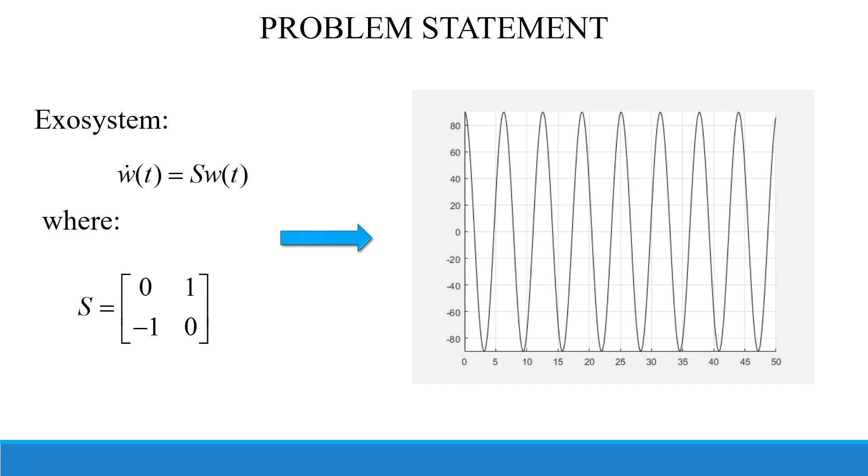However, there are applications where the exosystem may be unknown. In this context, the present paper proposes a controller based on output regulation theory, where a high-gain observer is used to estimate the states of the unmodeled reference signals. This observer is structurally integrated into the discrete form of Francis's regulation equations as the exosystem.

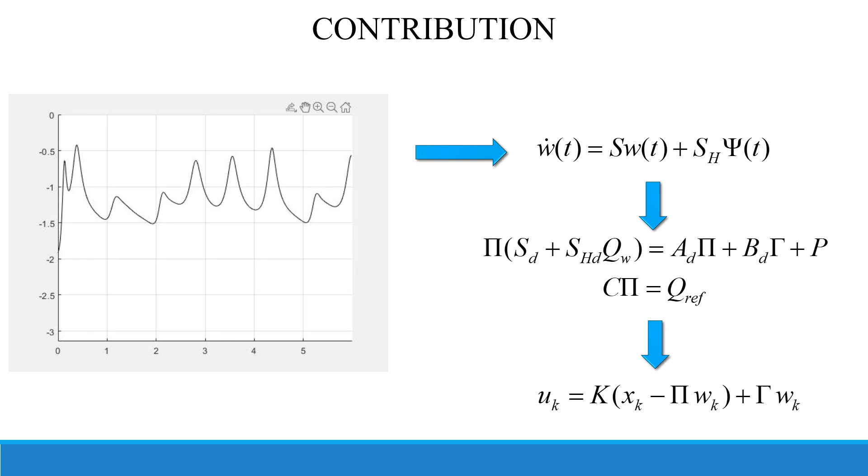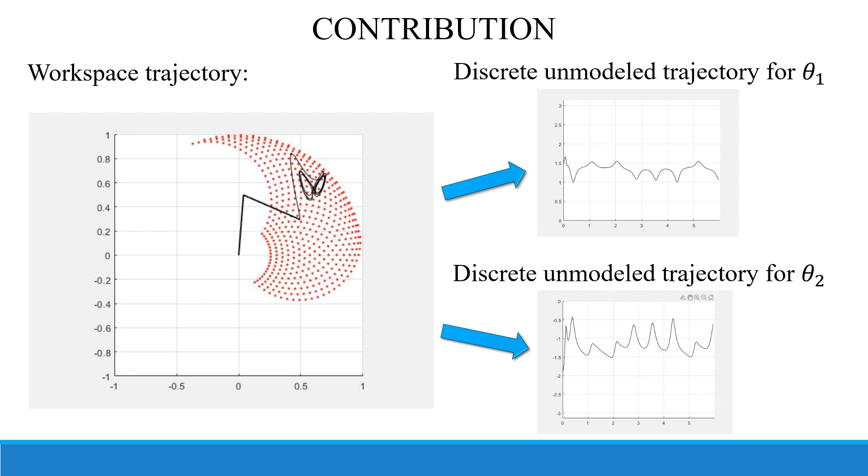The proposed approach assumes that discrete unmodeled reference signals are obtained by transforming a given trajectory from the workspace into joint space of a robotic manipulator. As a first case of study, a reference signal in Cartesian coordinates given by a Lorenz attractor is considered.

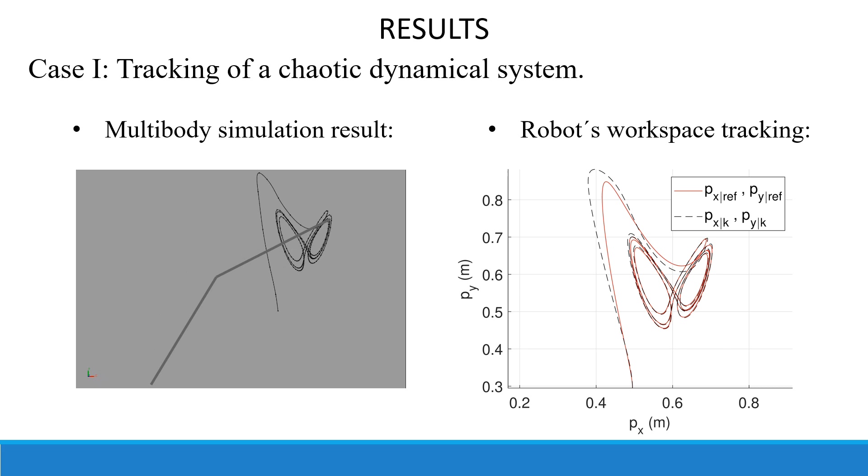The Lorenz attractor is characterized by its chaotic dynamics, sensitivity to initial conditions, and unpredictable behavior, making it ideal to demonstrate the robustness of the proposed control approach. Simulations depict the estimation and tracking of the reference signal for joint 1 and joint 2 with a bounded error.

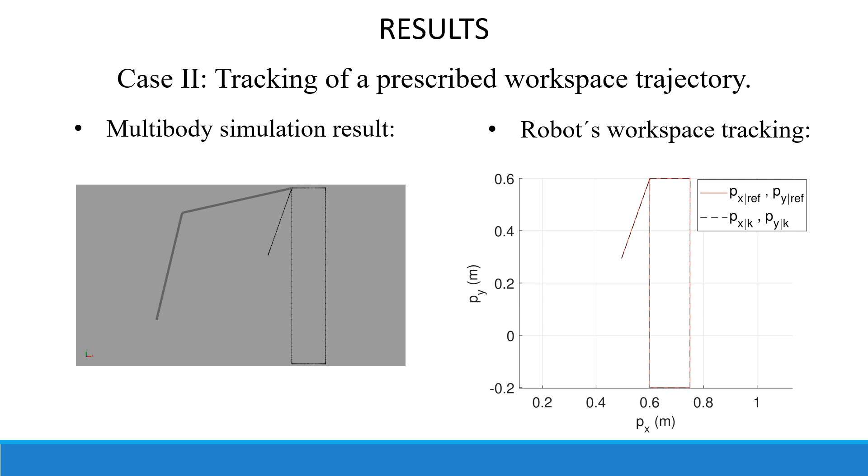A classical task of a robot is the tracking of trajectories in workspace. As a second case, a trajectory in the robot workspace with 5 linear segments is proposed. Simulations showed that the exosystem state variables accurately estimate the reference signals. Subsequently, the plant states track exosystem state variables, maintaining bounded errors. In accordance with Francis's theory, the regulation condition is satisfied in the robot's workspace.

A potential application of the proposed controller is the tracking of reference signals generated in real time during human-robot interaction, where free-form trajectories can be drawn by a user. In addition to the absence of a reference signal model, the presence of abrupt curvature changes and high-frequency components poses a challenge for the regulation task.

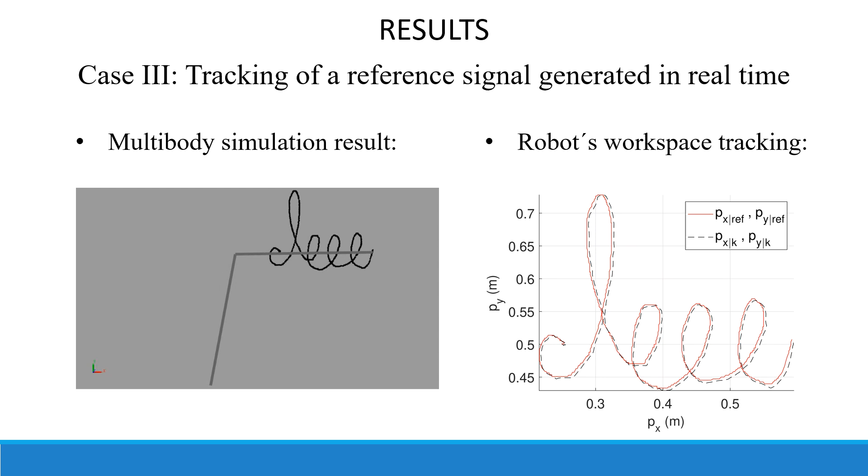Then, in this case, the reference trajectory is generated using an input device such as a pen tablet. The results for state estimation and trajectory tracking in joint space presented a bounded error as in previous study cases, satisfying the regulation condition of Francis's theory.

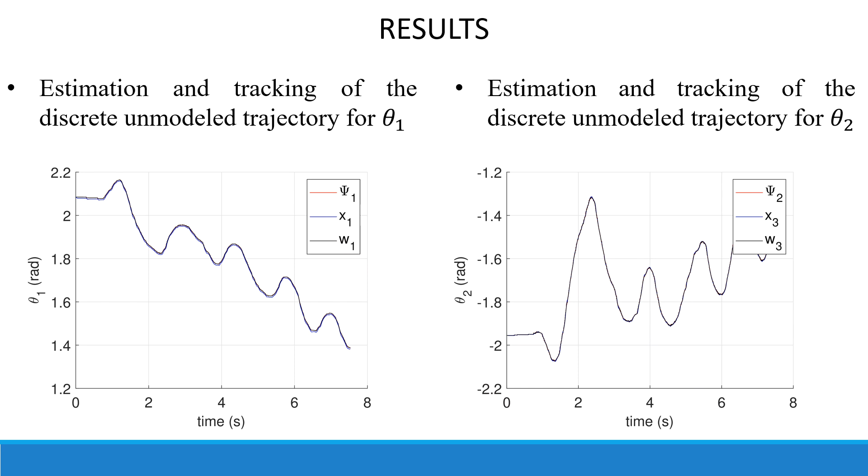The tracking of unmodeled signals using Francis's linear regulation theory in robotic manipulators can be achieved from the assumption that the reference signal lies within the robot's workspace, and by performing the corresponding coordinate transformation, the reference in the joint space does not have a defined model.

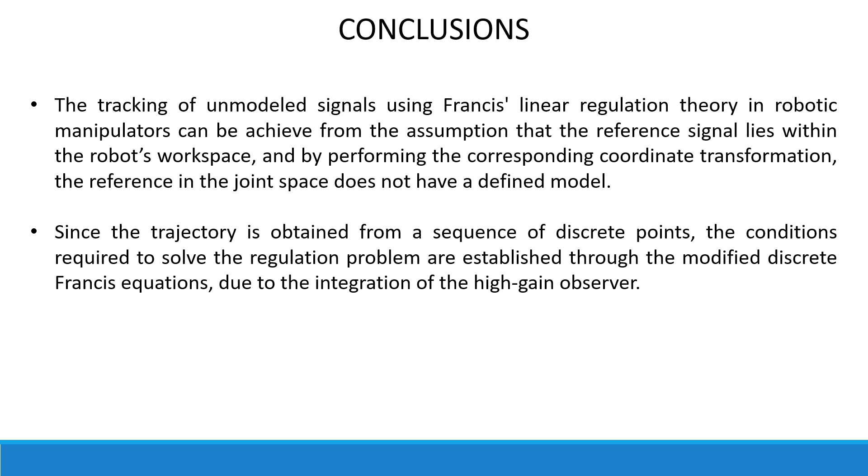Since the trajectory is obtained from a sequence of discrete points, the conditions required to solve the regulation problem are established through the modified discrete Francis equations, due to the integration of the high-gain observer. Despite the controller being designed under the assumption of the linear model, it was observed that the tracking error in each joint remains bounded, which is also reflected in the workspace.

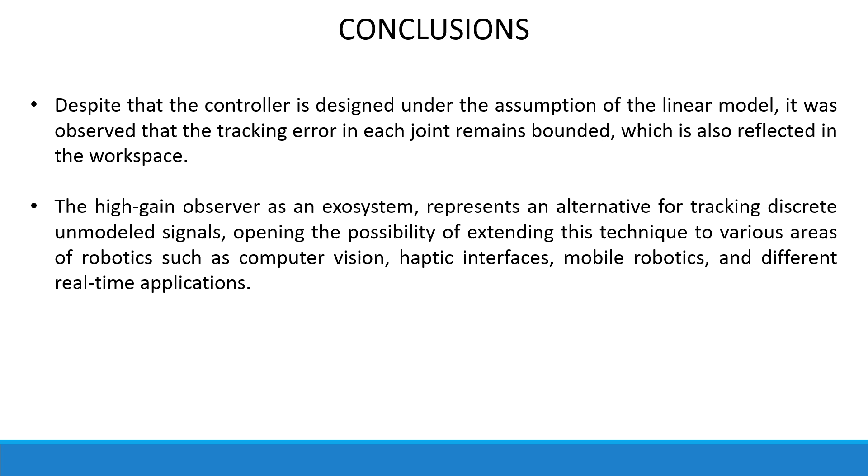The high-gain observer as an exosystem represents an alternative for tracking discrete unmodeled signals, opening the possibility of extending this technique to various areas of robotics, such as computer vision, haptic interfaces, mobile robotics, and different real-time applications.